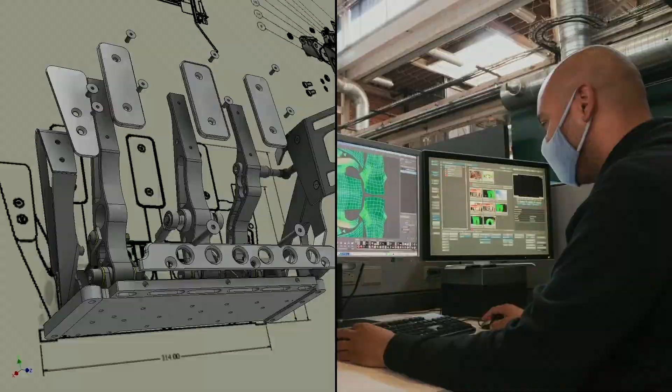We're being forced to adapt. And as we adapt, we're using technology and innovating how we get our work done. This is resulting in new ways of making and new opportunities. This path of innovation, while driven by painful circumstances, will lead to better jobs, better ways of collaborating, and better experiences. Think about it.

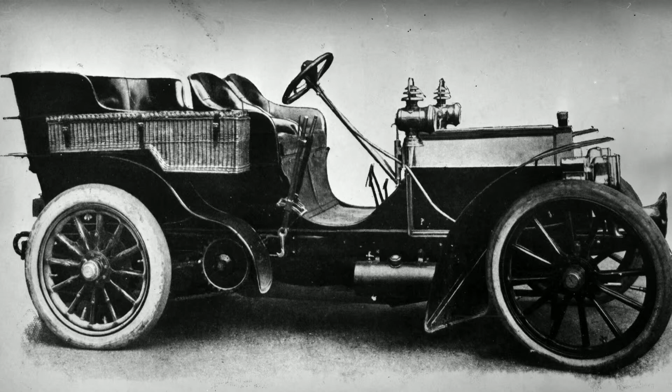Think about what happened with the automobile. Before we had the car, we relied on the horse and carriage to move people around. In 1886, the first car was invented, blending the horse and carriage into a motorized version of passenger transportation. It changed the world. The automobile made certain professions obsolete. Stables and grooms for the masses faded away.

People lost their jobs. But the car also spurred new opportunities. People could get from place to place faster and more easily. Roads were improved. New jobs were created, along with an entire supply chain and ecosystem of service providers, from auto repair shops to motels. The invention of the car over 100 years ago opened the door to new possibilities.

The history of transportation reminds me of where we're headed in our era. Today, it's not horses and carriages, it's your industries and processes. We're seeing you reimagine processes by combining previously siloed workflows. You're bringing together and converging people and tasks across functions like never before.

In Andrew's keynote, he addressed the common trends affecting you today: digitization of processes and workflows, distributed, more resilient supply chains, and the redefining of lines between the physical and virtual worlds. These are all hallmarks of convergence, and what Andrew called out as the new normal.

We're here today to talk to you about how Forge can help you harness the power of these new ways of making to reimagine the new possible. We'll be joined by 3 inspiring companies who will share how they've embraced convergence and are achieving this new possible using Forge. Susanna?

That's right, Greg. Today, you are going to see why Autodesk is in such a unique position to be a leader in this new era of convergence, and how Forge can help you embrace the new possible. And be on the winning side of disruption, not relegated to the history books like the horse and carriage.

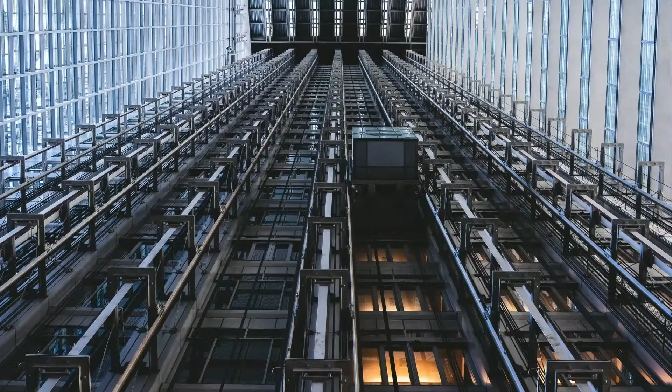Let's talk about elevators for a minute and how data is being harnessed in exciting ways. Toshiba Elevator are going to join us later to talk in detail about how they're using Forge. But right now, what I want to do is highlight how they're bringing together data from different sources, store specifications, and CAD systems to create a sales configurator. They're using our design automation APIs to create 3D models in the configurator.

And here's the big deal. These models can be customized on demand with greater input from their customers. Here, the power of automation creates a more personalized, more streamlined process from sales to design to manufacturing, all the way to delivery and installation.

And that's just one example of a company that is really embracing Forge and finding new ways of making. We are seeing customer growth across many industries and a huge demand for new applications. We have over 15 billion API calls per month running through our cloud platform.

Use of our new design automation APIs has soared 720% year on year. And if we look at our ecosystem, we are approaching 8,000 developers and over 1 million downloads a year from our App Store.

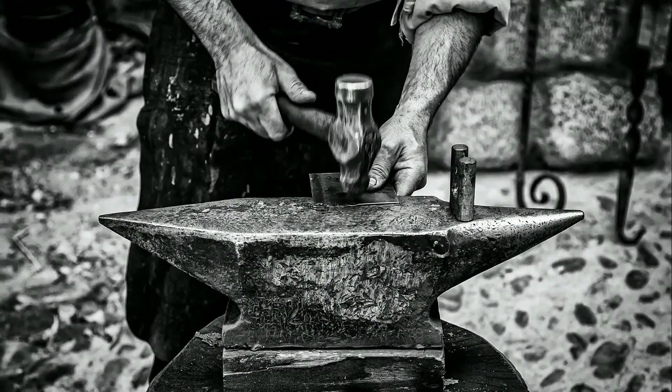Things are converging. To explain what we mean by convergence, let's take a step back and look at how modern ways of working have evolved over time. In the pre-industrialization era, a master craftsman had all the skills and resources needed to get the job done within short reach. He handled the full start to finish creation of products. Supply chains were short and unified.

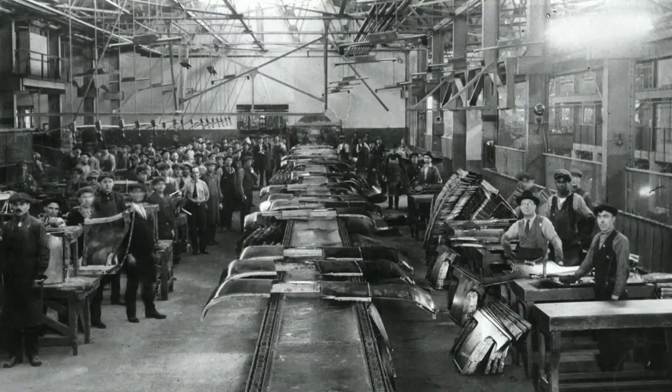With the arrival of the Industrial Revolution, mass production led to specialization. Supply chains became sequential, longer, and siloed. Specialists handled unique tasks. This process repeated across all kinds of different work arenas, forming complex industry structures.

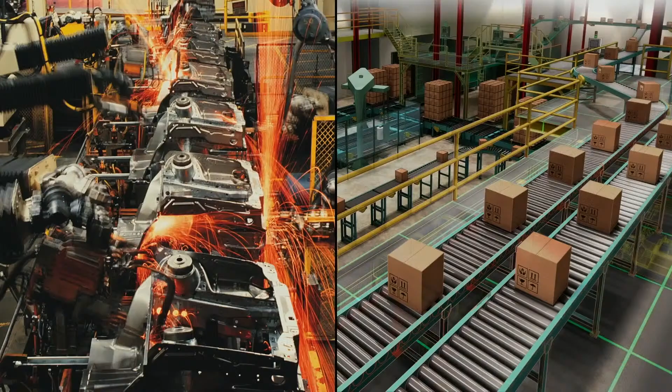Today, digitization, which is rapidly accelerating with cloud computing, is creating the new digital craftsman. We're moving to digitally unify supply chains and more integrated know-how. Previously siloed workflows are now connected across digital ecosystems. Companies are able to complete full product life cycles from start to finish. New ways of making are emerging. These are new forces allowing for convergence.

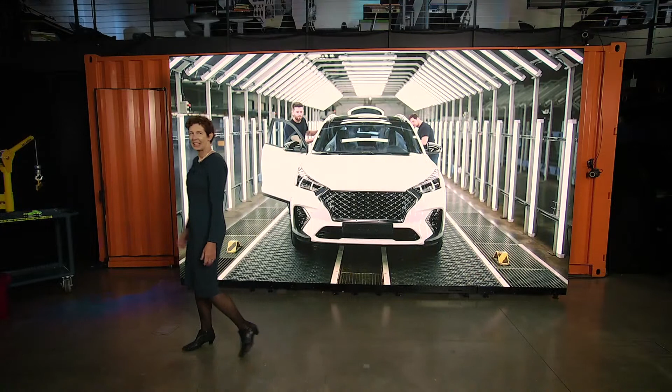Let's look at an example of how the progression in new ways of making has played out over time. Susanna? Yes. And to do that, let's revisit our previous example of the evolution of cars. So before cars, craftsmen specialized in building carriages from start to finish.

Now, with the evolution of the combustion engine came the convergence of the horse and carriage, which led to the Model T, and mass production, which was enabled by assembly lines. Today, companies are changing the automotive game again by introducing the software car.

Think about how revolutionary this concept is for you as a car owner. If you have a traditional car, you get it as it is. It degrades over its lifetime, eventually you buy a new one, and you start all over.

Now, companies are improving cars even after sale with the power of the cloud. By automatically releasing new functionality to existing cars through software updates after purchase, they can continuously reshape customer experiences by adding new value to something the customer already owns.

In addition, we're seeing companies embrace online, on-demand sales models and a different kind of in-person retail experience, thus challenging the traditional franchise system. In this new normal, that's proven to be a much more resilient way of doing business. And of course, we're seeing more electric cars on the road.

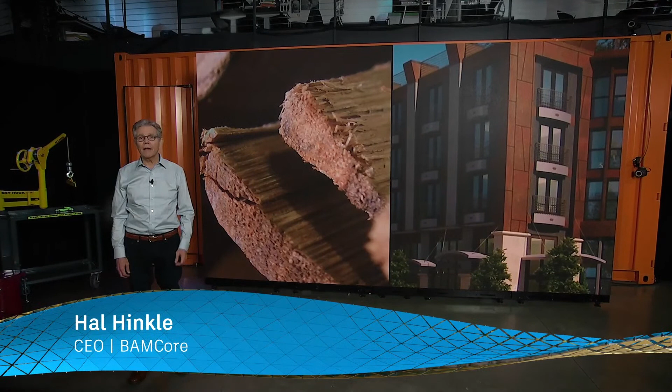Thank you, Susanna. Those are the two great challenges the built world faces today and will face for decades to come: climate and inefficiency in both construction and operations. To address them, we have to find ways to reduce the carbon, cost, and labor that goes into our buildings.

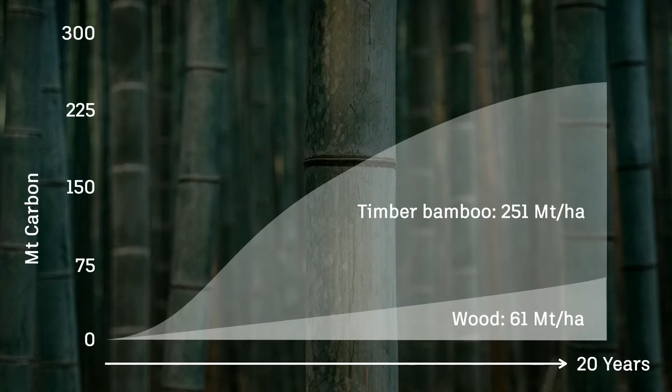At BAMCore, we've known from our beginning that we had to change the material used in our buildings, moving away from concrete, steel, and even wood toward timber bamboo, nature's fastest growing structural fiber. Whether per area of land for growing or per time to harvest, bamboo is somewhere between 400% and 1,000%, or 4 to 10 times more productive than wood.

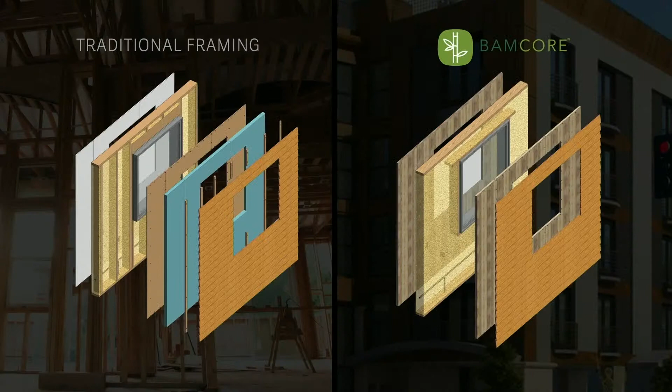And bamboo has amazing mechanical properties. It can have the tensile strength of steel and nearly the compressive strength of concrete. At BAMCore, we use these properties to make super strong panelized walls that eliminate nearly all the studs, headers, and posts in conventional framing. And when you eliminate the studs, you get a far more thermally and acoustically efficient envelope.

But once we got going, we learned we had to change more than the material—we also had to change the method. Here's how that happened: after we manufacture the high-performance panels, we fabricate them in the factory to the specific job, to millimeter accuracy, by taking the AutoCAD file and building a 3D BIM model in Revit.

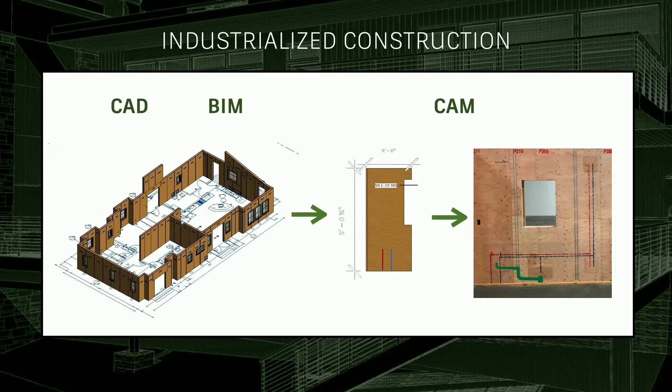This is just the basic workflow of industrialized construction. But to explain our new system, we had to spend a lot of time emailing loads of PDFs to all the players in a typical build: architect, engineer, framer, subcontractors, and other manufacturers. That is, until we started using the Forge platform.

Forge allowed us to share the full 3D BIM model with everybody in the workflow, whether they were in the architect's studio, at the engineer's office, or even on the job site. And since the viewing could be done on a browser, advanced computer skills were not required. Every stakeholder could benefit—it was like democratizing BIM.

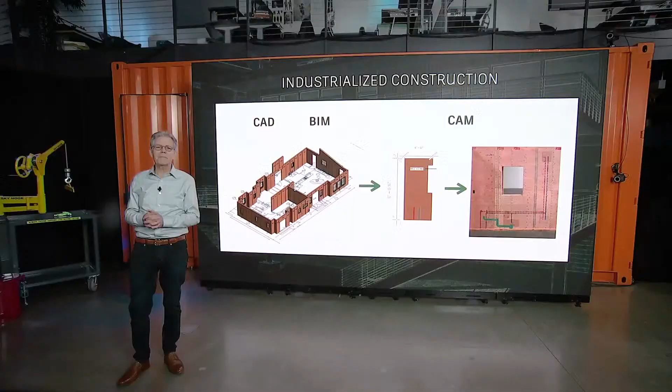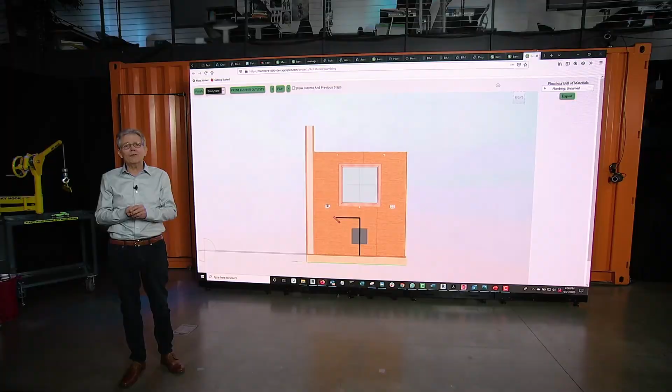Right out of the gate, we were able to share interactive pallet lists and bills of lading, and importantly, a job site animation tool to show exactly how to install the walls. We had the beginnings of an orchestrated workflow that went from design through manufacturing to construction, but it didn't stop there. Since Forge is a two-way platform, we can also collect information from all the stakeholders too. What was once a disconnected workflow can finally converge.

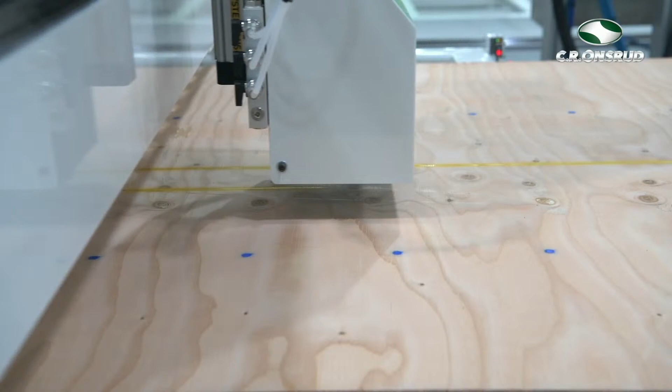Using Forge, we will be giving the trades the ability to generate their own takeoffs and bids right from our BIM model. They can even mark locations for every line, pipe, or cable for their crew, and do this in a browser with simple drop-down menus. We then print these utility locations, color-coded, right on the panels, which in effect closes the industrialized construction loop.

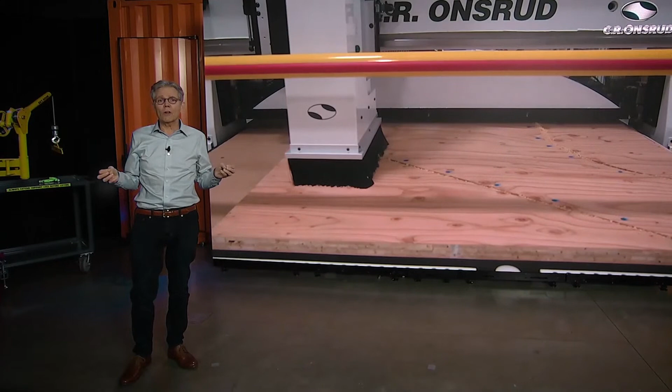This orchestrated workflow funnels all the jobs through the BIM model to custom fabrication and onto the job site for visually guided installation, lowering the need for a large, highly skilled labor pool, speeding the installation, and lowering job site waste. And it doesn't matter whether you are the architect, engineer, framer, electrician, or plumber, or if you're on a desktop or a cell phone.

All of this comes together in our design-bid-build platform that converges all the workflow together through Forge. And when we put these pieces together, we started looking for other ways to achieve team convergence, especially relative to the sustainability of each building, where carbon must be dealt with and bamboo may be our most promising tool.

And that led us back to the design phase, where we realized that new environmental decision tools were becoming available that plugged right into Revit. Once the BIM model is built, building designers and owners can use the Autodesk Insight software or Tally software to project price and energy savings during operations, as well as embodied carbon savings during construction when they switch to the BamCore high-performance wall system instead of using conventional framing with concrete, steel, or studs.

To lower the carbon, cost, and labor of the built world will require the adoption of industrialized construction. Today, we see two paths forward. The first path leads to simple, static factory automation, producing mostly modular, uniform units.

On the second path, the workflow is orchestrated across all the members of the team, and the participating industries converge instead of being fragmented into silos. Importantly, this path can lead to mass customization while still providing the efficiencies of industrialized construction. And this can take us into a future where the entire built world can serve us individually at a lower cost while also protecting the climate.

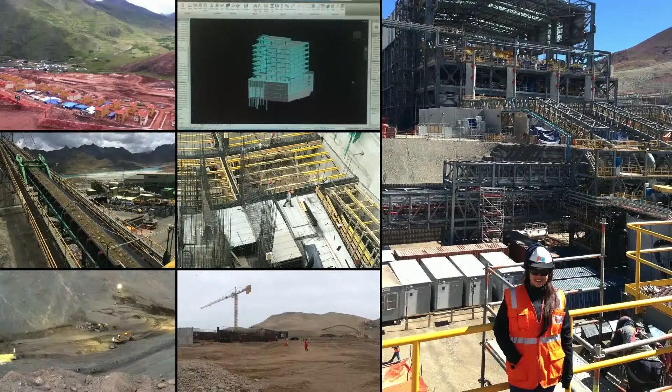Greg, thank you for having me. I'm excited to be here today. As Greg said, my name is Myra Soto, Head of Product for HoloBuilder. Prior to HoloBuilder, I worked as a control project manager in construction projects such as mining and commercial projects. Since leaving the field, I've joined the technology world to tackle many of the challenges that I encounter out there. A journey that started at HoloBuilder more than 4 years ago. I'm excited to share a little bit about that and our partnership with Autodesk today.

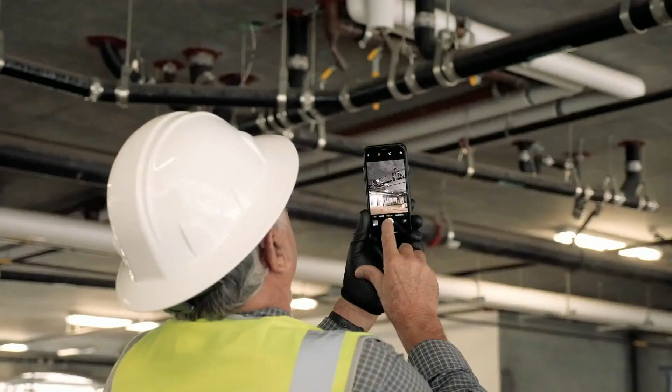One of the biggest problems that I have experienced during my time as a control project manager is the problem of unorganized information and delays due to either missing data from the field or lack of context for the information being reported. I've received invoices that did not reflect what the field actually looked like, but there was no way to verify that without traveling across the country to visit the site. Even though many people in the field would snap pictures, the large data sets and missing context resulted in me spending hours searching for the right picture or going to the field to verify information. This tedious task drove me crazy as the deadlines kept piling up.

This is the challenge that prompted us to start HoloBuilder, unstructured site documentation. So we went ahead and created a construction progress management solution for general contractors, engineering firms, and owners to document and communicate job site progress in 360 degrees, addressing many of the challenges that I face in the field. The industry called us a street view for construction. What that really means is that sites that use HoloBuilder capture their progress with 360-degree cameras, which enables key stakeholders to gain remote site access and walk the site virtually from anywhere. It also allows the teams to have a solid progress record for the handover process.

The value really comes from interacting with the captured data to improve existing workflows around project controls, such as remote site access to reduce travel time, payment and invoicing verification, having a solid as-built documentation, and better team collaboration. We're excited to have been able to help builders around the world with this workflow on more than 20,000 sites so far.

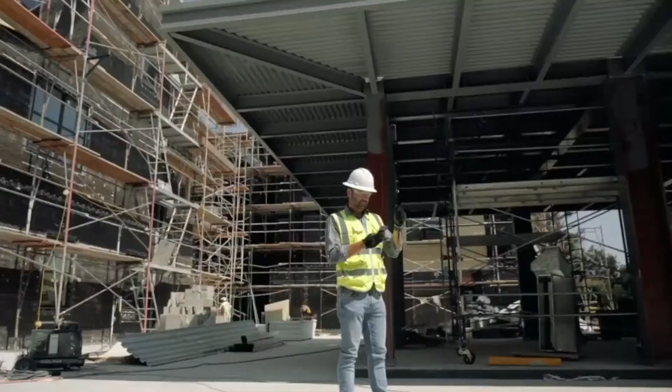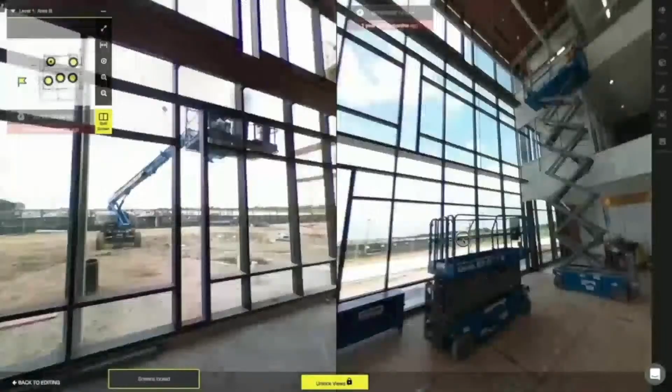One of your team members is in the field, walking the job, capturing progress with a 360-degree camera and HoloBuilder's JobWalk app. Your team will instantly get access to the data and is able to move progress forward no matter where they are. Your team can compare real-world 360-degree photos with BIM models by connecting Revit or Navisworks to HoloBuilder. You can even do measurements and generate markups that live within BIM 360. Forge allows you to do just that and keep the issues in sync and always up to date.

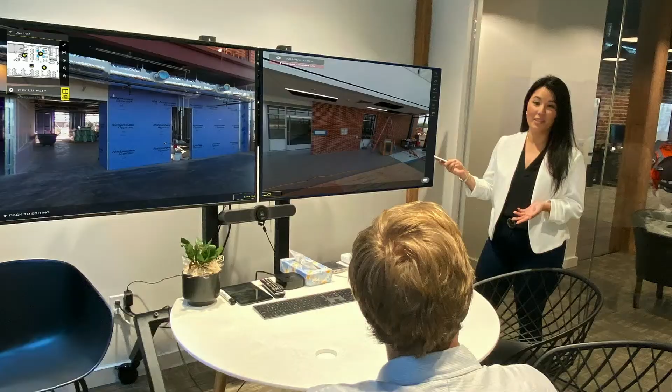And that's the power of integrated workflows. The difference that makes for the teams in the field and the office are massive. Having remote access to the job site removes confusion and improves communication between stakeholders, which results in improvements on schedule compliance by catching errors early.

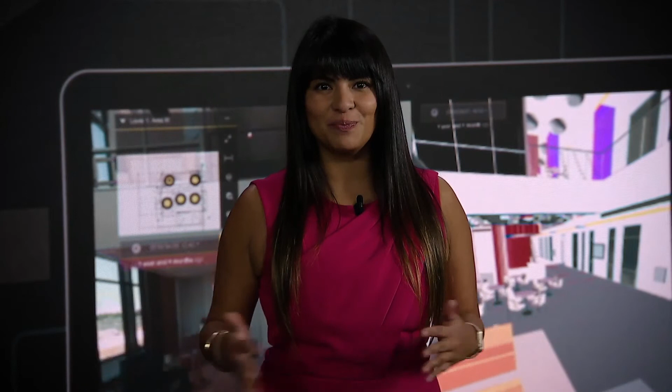We've come a long way in our partnership with Autodesk and Forge. But what the future holds is even more exciting.

As discussed, the value of HoloBuilder really comes from using the data to improve existing workflows. So now, and in the future, HoloBuilder will always be working on optimizing user workflow to increase speed of capture and even faster analysis of the captured data. All this has to be carefully thought through so the data can be even more efficiently collected and later on serve many workflows and processes while ensuring data privacy and security.

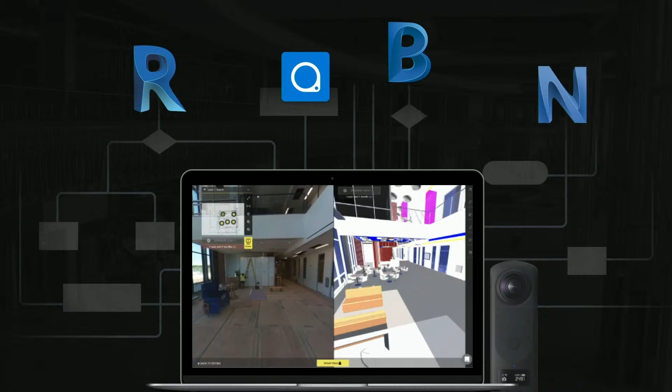We are working on creating an automated way to collect the most data from the field with the SpotWalk, HoloBuilder's integration to the Spot robot from Boston Dynamics. But in addition, to gain insight from the data already collected by enabling AI and machine learning. The main goal is that the user does not need to process the large amount of data, but that technology tells the areas of focus so decisions can be made even faster.

We are excited to be Autodesk and Forge partners and look forward to having our customers guide both of our teams to new and innovative ways to integrate our solutions even deeper and drive connected workflows for the industry forward.

Wow, Myra. I love your story, and it's so well told. This is a great example of a BIM 360 ecosystem partner who created an integration on top of the Forge platform to bridge those gaps and connect data, thus bringing information into a visually rich and real-time environment. And that's exactly how you fuel those discussions that are so badly needed, and how you drive data-informed decisions.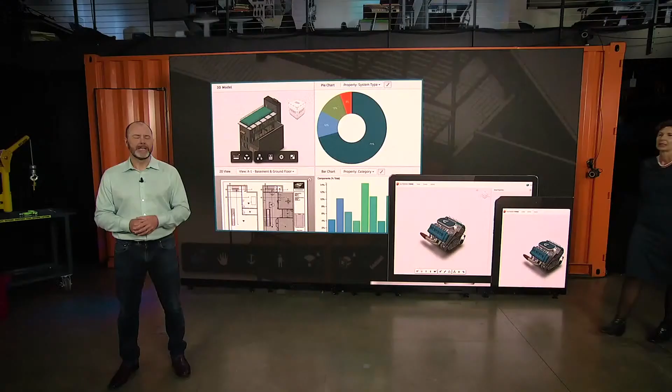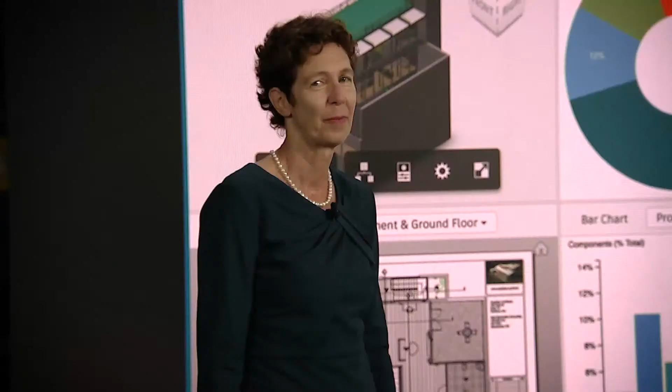I am struck how all these stories illustrate the power of the digital transformation today. This is why at Autodesk, we're so invested in Forge and the opportunity to partner with you on your journey to reimagining possible. And we too are taking our own advice and accepting the demand for better. And we have some great things on the horizon. I'm excited to share a glimpse into the new capabilities that we're adding to Forge.

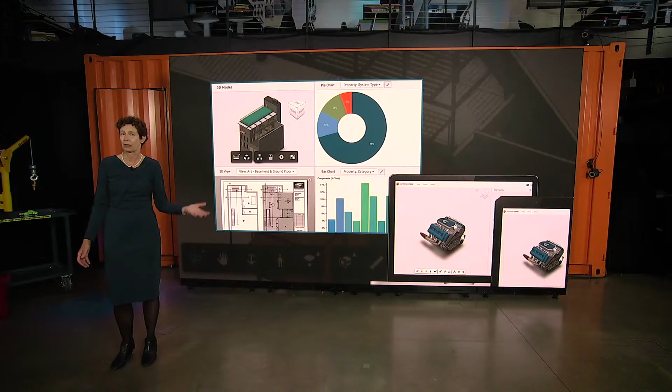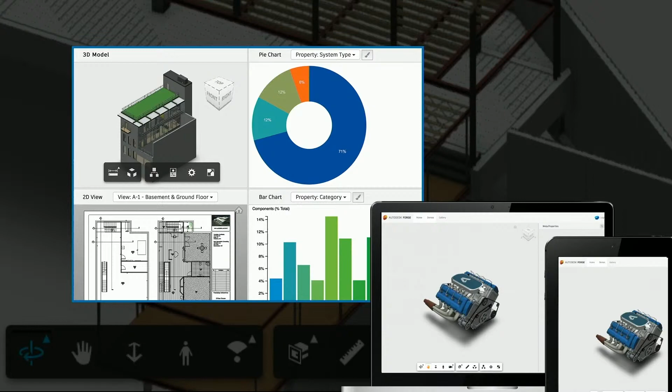So you already know that by far the most utilized service on Forge today is the viewer. This is a service that brings to life 2D and 3D model data through visual experiences, and it helps you draw better insights from your design and make data. We want to help you visualize the convergence of design data and external data sources inside the viewer to enable innovative solutions like factory dashboards, building operation tools, and digital twins.

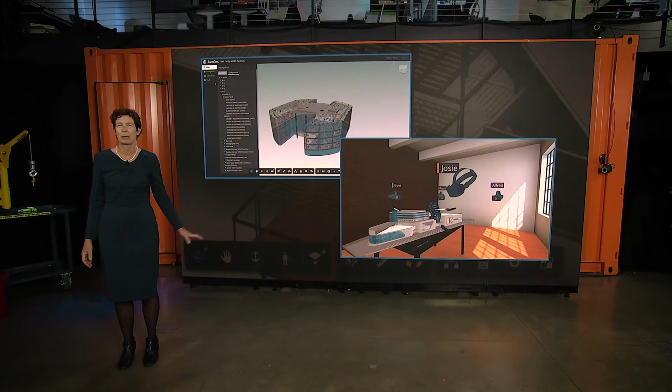Now, we know that building these solutions from scratch can be incredibly painstaking. It can be time-consuming, and it can take thousands of lines of code. And when those thousands of lines of code have finally been written, they can be fragile and hard to maintain. So we want to simplify how you access the capabilities and make customizations of those solutions accessible to you.

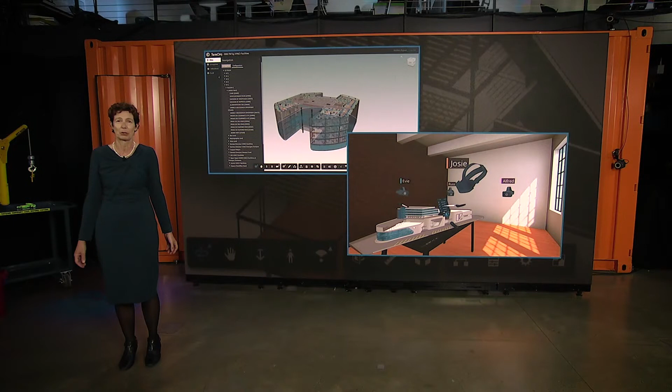And in order to do that, we're building a set of components into our viewer which will make it easy for you to hook into streaming data sources, including out-of-the-box connections with leading IoT providers like AWS and Microsoft Azure.

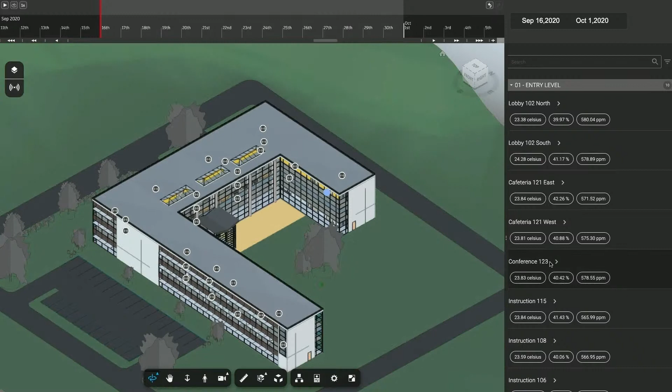Here you can see an example of this with a building model. This building is outfitted with a number of sensors that track temperature, humidity, and more. And these sensors are connected to Microsoft Azure's digital twin service.

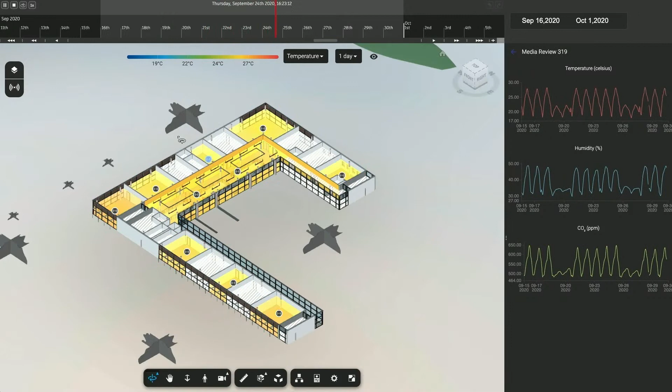After connecting to the data source, viewer models can easily be decorated with visual representations of that data, such as heat map overlays. And the result? Simple but effective visualization of data, from which building owners can derive insights, automate processes, and improve the efficiency of buildings.

And of course, the use case for this functionality extends far beyond just buildings. As Susanna said earlier, our ultimate vision for Forge is to open up access for you to all of your design and make data, regardless of where it's stored.

This is already happening in the construction space. Through Autodesk Construction Cloud, we have integrations with over 140 top-tier partners, and we're continuing to connect services and APIs and expose them on Forge to provide more value to customers in our construction cloud.

For our manufacturing customers, we're opening Fusion's data model to make it accessible through the design to manufacture process. Combine that with data from other applications and workflows, and you can connect teams more effectively, efficiently, and streamline your processes even faster.

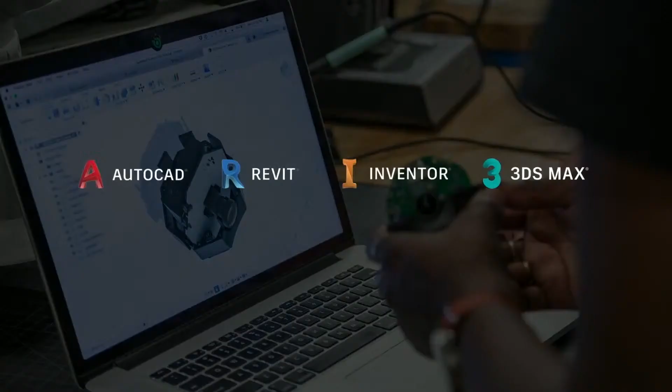As for automation, customers are already using AutoCAD, Revit, Inventor, and 3ds Max design automation in the cloud today to enable automated design workflows between architecture, building design, construction, and manufacturing. And soon, we'll be adding Civil 3D design automation to our toolset in the cloud.

With design automation for AutoCAD, Revit, and Civil 3D, our customers are able to create apps that automate numerous infrastructure design and data sharing tasks. We're also working on building deeper integrations between Inventor and Revit, enabling automated design workflows between architects and building product manufacturers by allowing Revit family creation directly in Inventor.

You can get more detail on these updates, along with everything new coming to the Forge platform in our Forge Roadmap class. We have so many other ways you can learn about Forge during Autodesk University. You could tune into our Forge classes, get inspired by what our customers and internal teams are working on.

You could drill down on how Forge can help you in our Forge for Industry content blocks. And if you're looking for fun ways to get to know Forge, you can check out the top Forge hackathon solutions from last week. Or, and here's my personal favorite, see Greg answer your burning strategy questions on the Forge Fire Face-Off. I'll be making a guest appearance too.

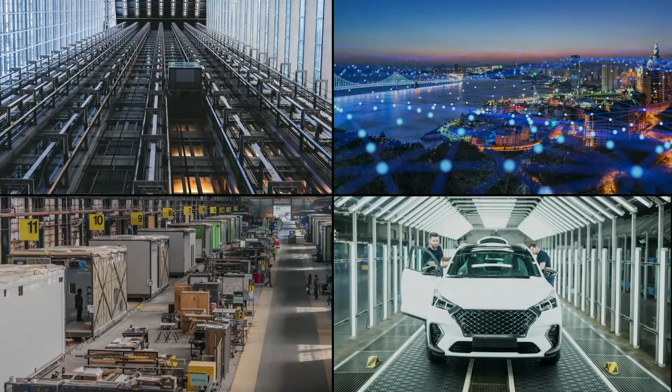Let me leave you with this. Forge and Convergence really are part of the greater journey of human innovation. We've talked today about the reaches of what we can do when we reimagine possible. From the era of the horse-drawn carriages, to the Industrial Revolution, to today's digital transformation.

In each era of disruption, we've seen new problems emerge, as well as new professions, supply chains, and industries to solve them. The technology solutions we talked about today will transform into entirely new ways of working tomorrow. Whether it's industrialized construction, self-monitoring elevators, digital twins of buildings, or the future of the automobile, more and more opportunities to bridge the design to make gap are happening.

Autodesk and Forge are here to help you reimagine possible, to change the question from what is to what if, and embrace the new digital ways of making. Thank you for joining us.